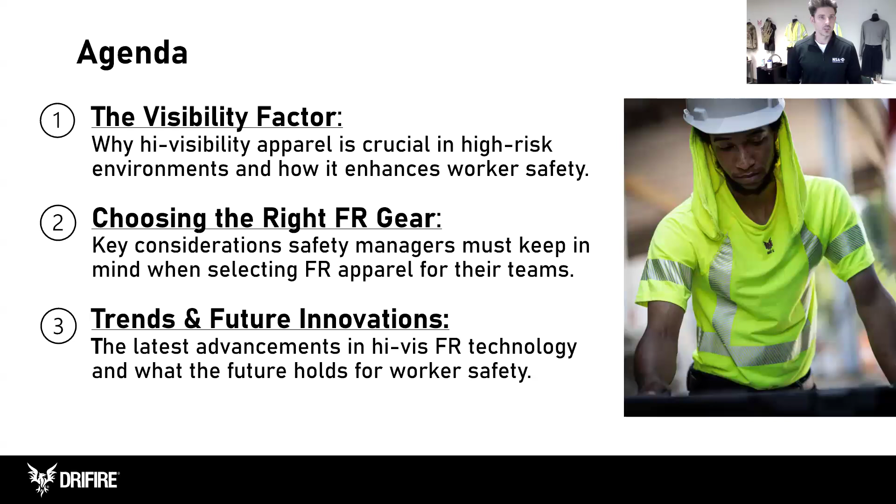Awesome, thanks Mike. Now, for those of you that don't know, Mike and I are in our Cleveland, Ohio office. And in Cleveland, we like to say that we have about two seasons, winter and construction season. So this topic is very near and dear to our heart and very timely for the beginning of spring.

First, I'm going to go over the basics of why it's important for workers to wear high visibility apparel in high risk environments. It's important because the Department of Transportation recognizes that struck-by incidents are extremely hazardous for those workers that are working on and near a roadway. This is what we call a struck-by statistic.

Now, it's important to know that not all struck-by statistics, when you're looking this up, say from the CDC or the Bureau of Labor, don't all involve being struck by a vehicle. This can include anything from a tool or a piece of equipment on a job site falling on you.

Now, when we do talk about those incidents that involve a vehicle striking a person, the CDC tells us that about 20% of those non-fatal incidents do involve a vehicle, and that comes out to be about 2,800 struck-by incidents that do not involve a fatality. Now, in those environments, such as a construction site, about 47% of all construction fatalities do involve being struck by a vehicle. So this is why it's extremely important for those workers to be seen in that hazardous environment.

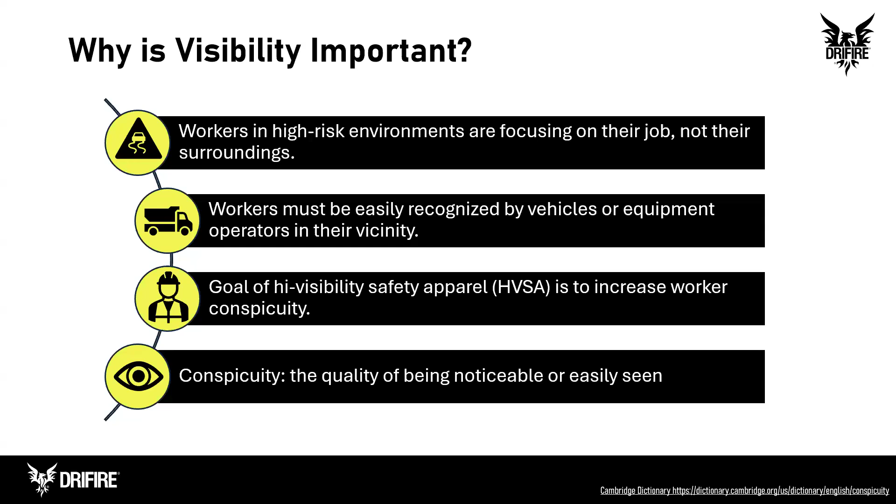When it comes to recommendations, the Federal Highway Administration recognizes that high visibility is one of the most important needs for workers performing tasks near moving vehicles and equipment. This includes anybody working in an environment where they have the potential to be struck by a moving vehicle, including working in proximity to traffic on a roadway, work vehicles on a construction site, or even equipment in a warehouse.

This is enforced by the OSHA General Duty Clause. Employers are responsible for identifying all hazards and protecting their workers against those hazards. In order to comply and protect workers, they should be following ANSI ISEA 107. For workers around moving equipment and vehicles, Class 2 and Class 3 compliance is the recommendation. We'll talk about the difference between those requirements and recommendations for different settings to use Class 2 versus Class 3.

It's important to note again that high visibility apparel is to help workers be seen while their attention is being diverted to the task at hand.

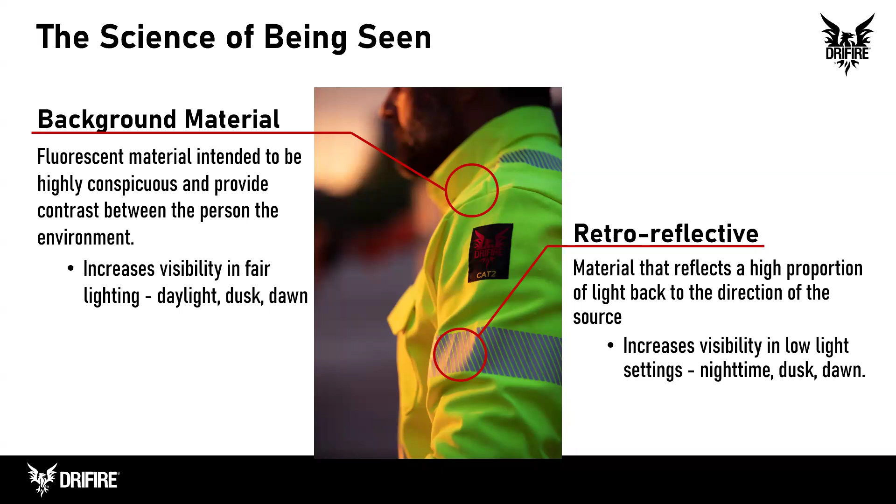Now we'll get into some more specifics on how to help increase worker visibility by using those fluorescent and reflective materials to create a safety garment.

The best way to increase worker visibility is to strategically place those materials so that you're accentuating the human form. And this is a recommendation for ANSI ISEA 107.

It's also important to have 360-degree visibility to ensure that you can be seen from any angle. When you combine this and you are putting that reflectivity on areas like the ends of the limbs, whether it's your arms or your legs, and around the torso, this is really helping to outline that this is the form of a human.

And this activates a natural instinct that we have that allows us to detect that this is a living organism versus a piece of equipment.

So by outlining that this is a person, they have arms, they have legs, and this person is moving, that helps someone recognize that this is a human, not a construction barrel, let's say.

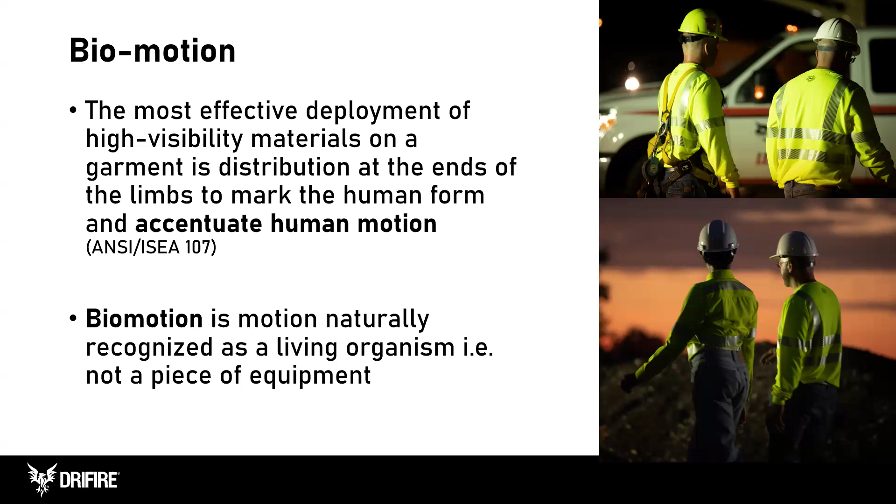Reflective material is key for nighttime visibility, which is why it's important to employ biomotion techniques, 360-degree visibility, and the combination of fluorescence and reflectivity to optimize worker visibility.

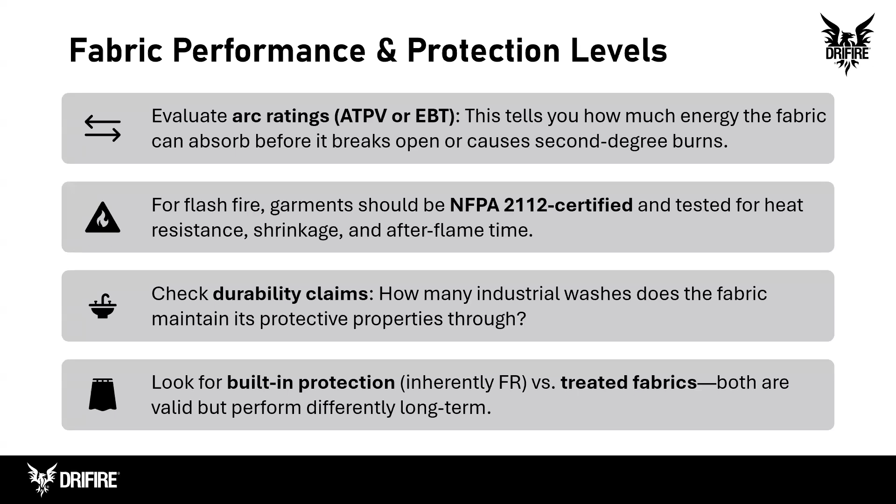Next, we'll look at a powerful example of why all these decisions, when considering fabric and garments, really matter. So we have a video here.

Before I get started, I'll tee it up with what you're going to be looking at: on the left side is a non-FR orange Hi-Vis jacket, and on the right is an FR/AR Hi-Vis jacket. They're both going to be exposed to an arc flash, and then you'll see some of the results that come from the video.

So as you can see there, this is a great visual just to show kind of the importance of making

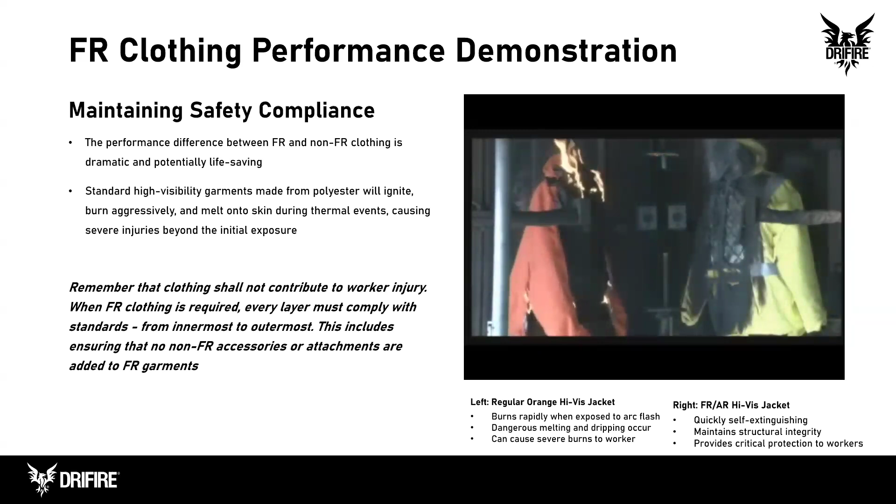So as you can see there, this is a great visual just to show the importance of making sure you are selecting FR Hi-Vis jackets. On the left side, that jacket burns rapidly, there's melt and drip - all of this can cause a secondary injury. Then you look at the right, at a proper FR/AR jacket, it self-extinguishes and retains all its structure as well. So really the difference between these two jackets could be the difference between a minor injury and a life-altering trauma.

So remember also, OSHA requires that clothing must not contribute to injury, which means every layer must be FR compliant, from outerwear to accessories.

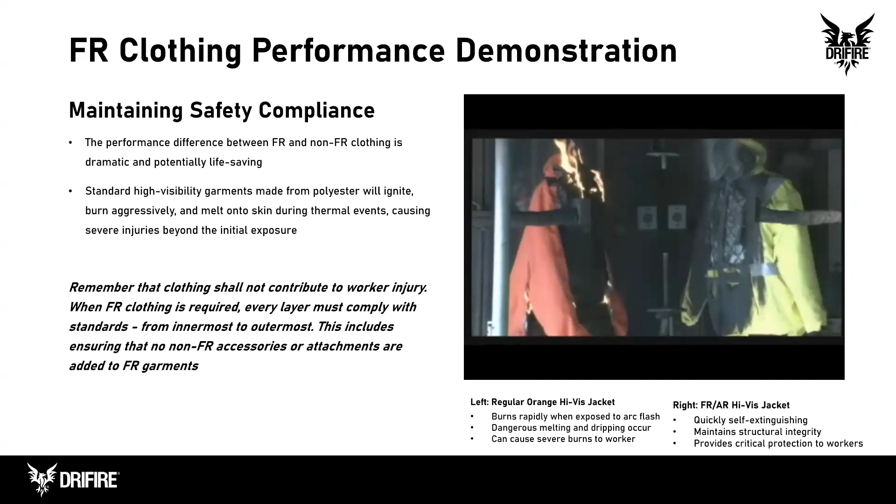All right, next consideration. I think everybody can resonate with this: comfort and mobility in your FR apparel. Everybody, whether you're a lineman or you're working in an office, the stuff that you wear to work, you want it to be comfortable. Workers are more likely to wear FR apparel consistently if it's comfortable. Compliance and protection really depend on this.

When you're considering FR apparel, make sure you're looking for moisture wicking and breathable fabrics to prevent heat stress. Look for garments with stretch panels and ergonomic designs. All of these features improve range of motion, critical for tasks like climbing, kneeling, or overhead work. Also consider seasonal needs: breathable knits in the summer, insulated but flexible gear in the winter.

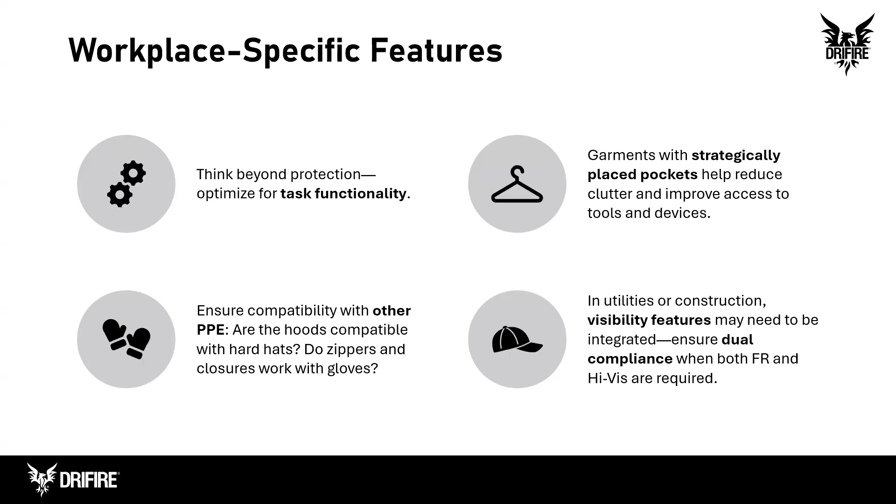All right, final consideration for a safety manager, and this is a big one: maintenance and cost. When we're talking about cost, we're not just talking about upfront cost. I encourage safety managers to look at the full life cycle of a garment and how long it lasts. Can it maintain its FR properties after dozens of washes? Is it easy to inspect for wear or damage? When you factor in replacement cycles and the risk of non-compliance, total cost of ownership becomes a much smarter way to compare your options.

And while you're considering cost, you also have to consider maintenance. If you properly maintain your FR apparel, it is likely going to last longer and protect people for longer. This may seem like a small thing, but it's very important. First, make sure you're reading the manufacturer care instructions on the garments. This is first and foremost. Always follow those care instructions provided by the manufacturers, specific to the fabric blend and construction. If you ignore those, you could potentially degrade the FR performance over time.

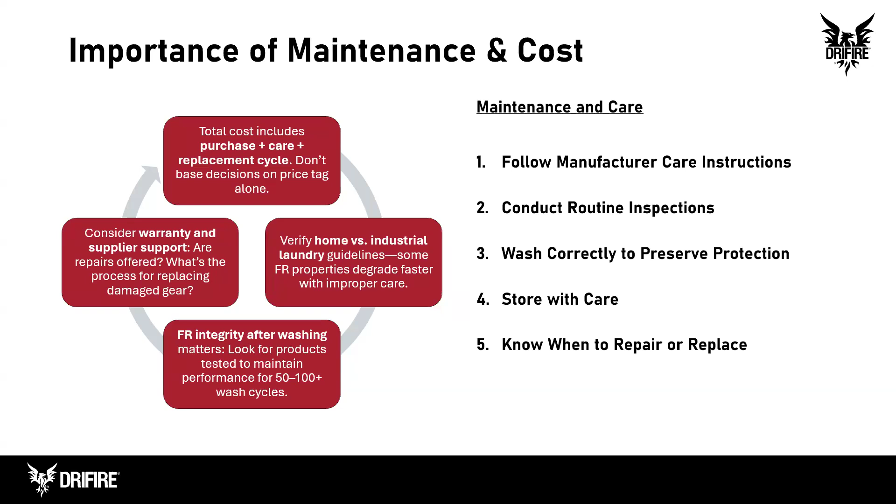So now that we have covered the key considerations, let's discuss understanding dual compliance protection. Let's start with why this matters. Why does dual compliance matter? Workers in electrical utilities, oil and gas, roadside construction, and other similar industries face both visibility and thermal hazards. Choosing the wrong gear could lead to non-compliance, or even worse, serious injury in the event of an arc flash or flash fire.

Utilizing dual compliance FR apparel will also reduce layering, which improves comfort and increases the likelihood that workers will wear the FR apparel properly. As you can see, a lot of these things connect to those key considerations I mentioned earlier for safety managers.

Also, when you're looking at a dual compliant FR garment, understand that it meets OSHA requirements, it meets company safety policies, and it meets all of the industry standards to keep your employees safe.

Now that you understand the why behind dual compliance, let's talk about selecting FR Hi-Vis apparel that is dual compliant. I want to start with classification. ANSI 107 defines type R garments for roadside work, and class 2 or class 3 reflects the amount of high visibility material and design features.

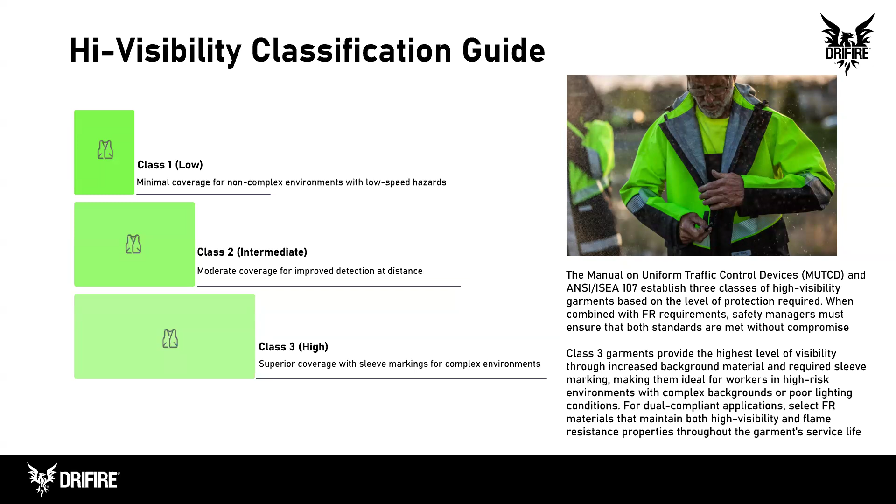Now we'll look in more detail at type R, for workers in close or near proximity to roadways. Workers near roadways face multiple risks, not just traffic itself, but divided attention and unpredictable surroundings. For these workers, type R high visibility garments are required, and when thermal hazards are also present, those garments must be FR as well. You're not just relying on a shirt or a vest—you're investing in a system that makes your people safer in fast changing, high risk environments.

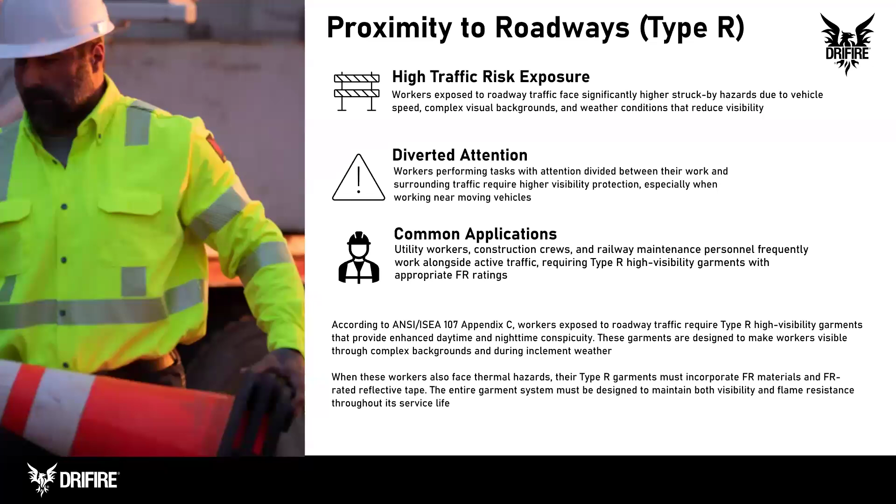Now we'll look at enhanced visibility for off-road applications. As we discussed with workers near roadways, there's also a need for jobs that don't happen on public roadways. In off-road environments like oil fields, mines, and refineries, type O garments may be appropriate, since these environments usually involve less traffic, slower equipment, and less visual complexity. But here's the key takeaway: even off-road, if there's a thermal hazard, you still need FR protection. Your hazard assessment should guide whether visibility or flame resistance is the greater concern, and the gear should reflect that balance.

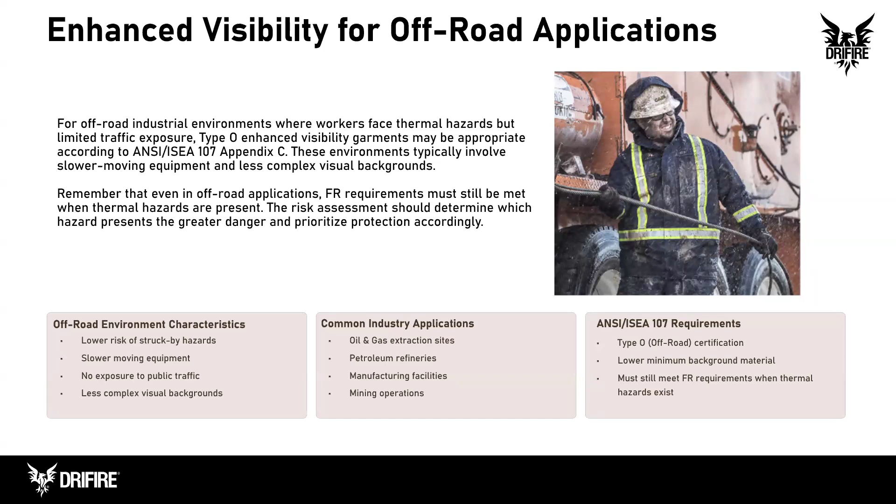Now let's look at a real world example. Let's take an industrial electrician. These workers often operate in confined or dark environments. They perform high-risk tasks, and they even take part in emergency response. Industrial electricians need arc-rated protection per NFPA 70E, but they also need to be seen by coworkers, responders, and anyone else on the site. So their protective gear must deliver both fronts, visibility and thermal safety, without compromise. And again, this leads all back to the hazard assessment we talked about earlier in the presentation.

Yeah Mike, this is one thing with our Enespro Arc Flash gear that as we were developing the line, we really started to see workers asking for this and safety managers asking for this. In these environments, historically, you would have just a navy garment. But we're really starting to see more of a push to increase worker visibility because their attention is diverted, because it's a complex, hazardous environment. You want them focused on the job and you want people around them to see them and steer clear of what they're doing, especially in an arc flash zone. So this is a really great application where even if you don't necessarily need to meet the requirements of ANSI 107, enhanced visibility could definitely be a good idea.

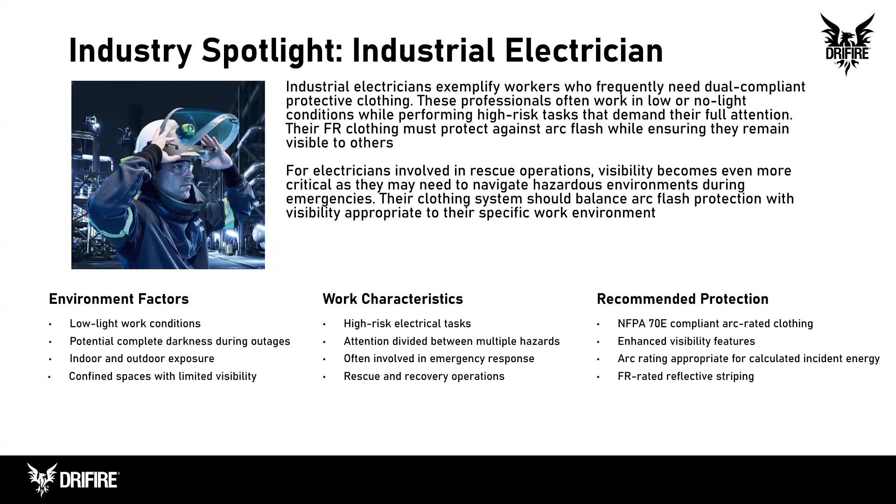So now we want to do a quick shift of gears here and talk about some of the latest trends and innovations shaping the FR Hi-Vis market. And I'll kick it back to Melissa to get us started here.

Thanks Mike. I think the increased interest in enhanced visibility and worker visibility, even for off-road applications, is a key trend in and of itself. Another thing we see is the focus on heat stress and comfortable protection and mitigating heat stress. We've talked a lot about roadside workers and utility workers. These are people that can't take a day off when it's 90 degrees. They have to be able to work in those environments. So how can we help them work with less impact of heat stress?

Studies show that productivity does drop as temperatures rise. So how can we as safety professionals help mitigate that impact on workers? According to a 2018 European study, combining data from over 100 studies published between 1950 and 2018, researchers studied the effects heat-related illness has on worker productivity and overall health. They found that for every 2 degrees above 75 degrees, productivity drops 2%. Now, 75 degrees isn't really all that hot, so it's extremely important to continue to be mindful of this as our global temperatures rise.

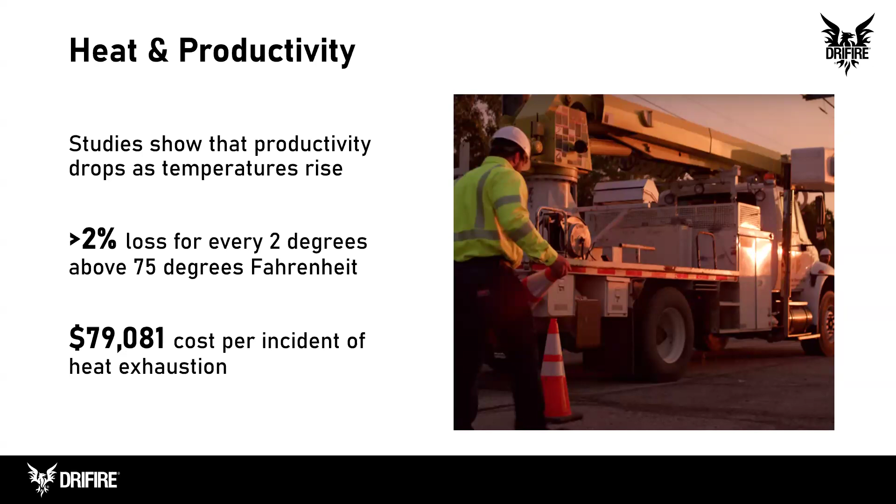So what are some of the characteristics we should look for in PPE to help workers stay more comfortable? According to workers we've talked to in the electrical and oil and gas industry, the key characteristics they describe as comfortable are moisture wicking, lightweight, and breathable. Comfort is very subjective, but these are the key terms we constantly hear people asking about in the field. Moisture wicking is kind of a new one. More and more people see this in their own life with workout gear or performance gear at the gym. They recognize this helps keep them cool and comfortable, so it's now something they continue to ask for in a safety garment.

New advancements in FR technology have allowed these comfort performance indicators to come to life in protective materials. So you can now have lightweight, breathable, moisture wicking materials that don't sacrifice protection, and there's plenty of technologies available in the market. I'll kick it back over to Mike to talk about ways you can incorporate these technologies into your Hi-Vis FR gear.

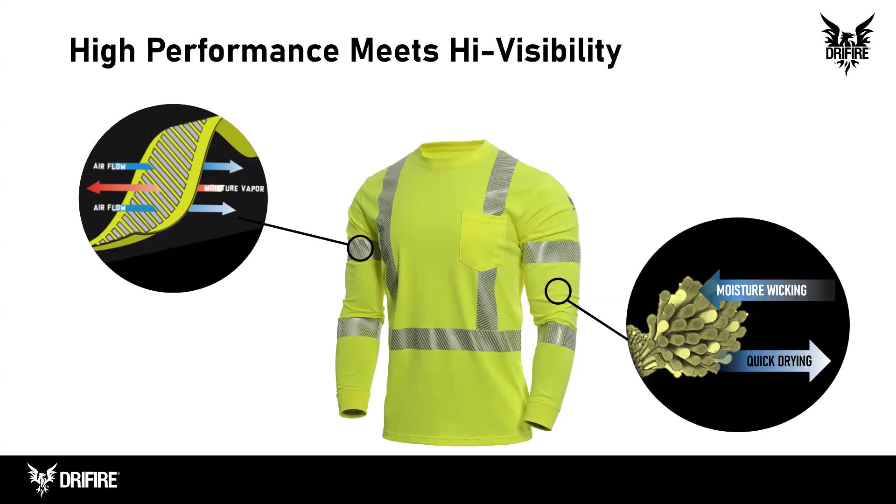And many have the UPF 50 plus rating as well. This is for long-term sun protection, making the FR garments a smarter choice for people who are going to be in all-day outdoor wear.

The other thing we're seeing in the market is reflective trim. So it's no longer just a compliance checkbox, it's also a critical safety feature as well.

FR-rated reflective trim is designed to maintain its integrity during arc flash or flash fire events, unlike standard reflective tape, which can melt or ignite under extreme heat.

It's the segmented and stretchable options that move with the garment. The trim is improving the comfort without really sacrificing any of the visibility or protection.

The takeaway is pretty simple here. Today's FR Hi-Vis apparel isn't just compliant, it's now smart, durable, and comfortable. Like Melissa said, a lot of those features and benefits that came from athleisure wear or athletic wear are now in the FR market as well.

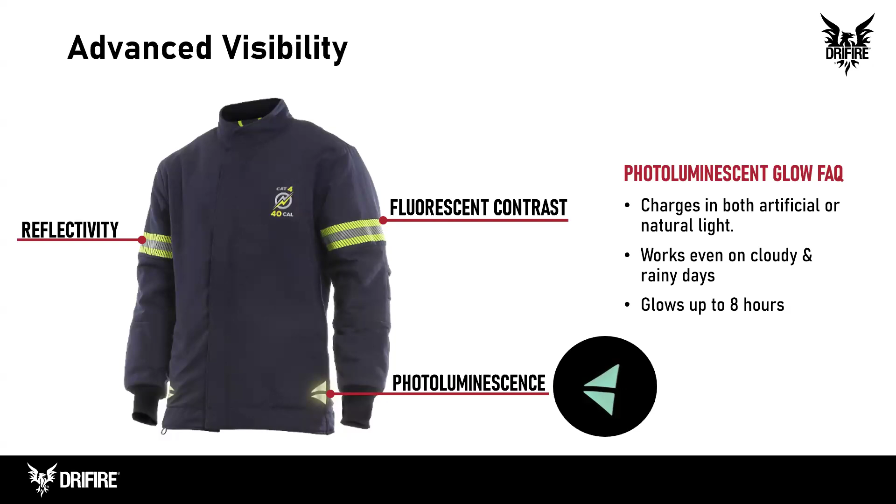So why is this important for electrical workers? Well, electrical workers are oftentimes working in a power outage situation. So not only are they able to be seen in low light, ambient light, good light, but they can also be seen when the lights go out.

So if you are working in a power outage situation to restore power, this is going to allow you to be seen in that potentially dark industrial environment, on that roadway, as you're restoring that power. So this is a real neat innovation that is just coming onto the market.

So it really just goes to show you that safety technology is constantly evolving, and really new and exciting things are making their way onto the safety space that just really take worker safety to the next level, and allow us to keep innovating in terms of worker safety, comfort, and just overall helping those workers to get home safely to their families at the end of the day.